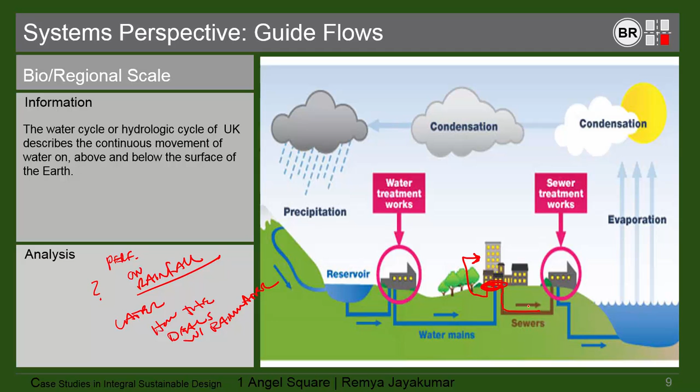All right, so there's that. So this is good, it's almost really a global. You could actually say this is a global. And one of the things we're trying to do is, if water is being cleaned here, it can actually go back into the building. I wonder if they did that, because what's happening is water's going down this way and being sent out here, and you have to wait a long time for the water to come all the way back. So, all right, good. So this has a global identity, specialist activities, and employment opportunities.

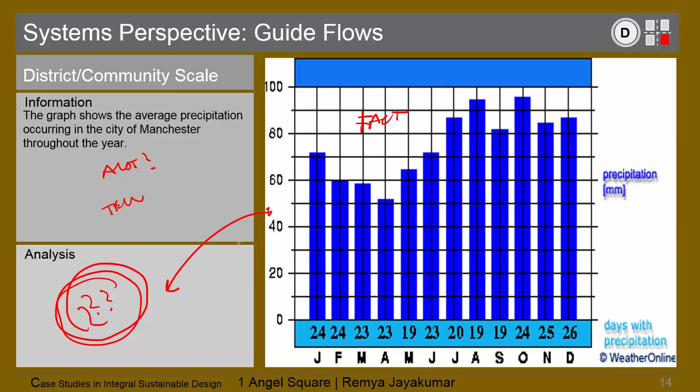I'm going to talk about BREEAM at the site scale - I would wait for the building scale. But I might also put this at the manifest meaning level, because it talks about the ethical meanings. But this is fine.

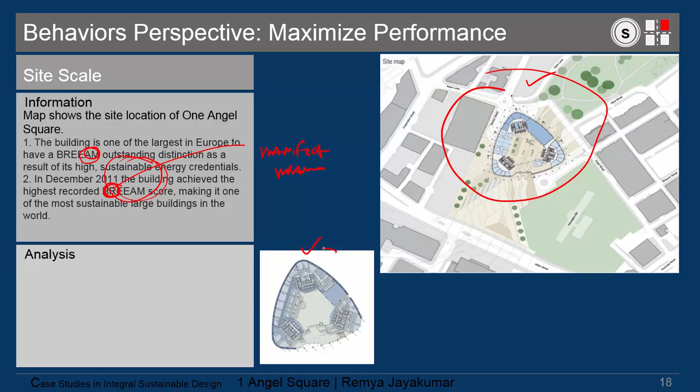You can use this at the building scale for performance. So really, you definitely need to get this for the building. Let's see - and this is really building, this is really not site.

What's really interesting here is this is a great systems one, right? So they're pulling fresh air - this is called an earth tube - and then they're running it out. Building sustainable cogeneration, oh that's good. So where is the cogen plant in this drawing?

Don't see it. It'd be good to see some of this - this building has used rain, right, so I need to see more of these. Where is the rainwater? I see the rain, and I see the showers. Where is the cistern? You've got a double skin facade there, that's cool - kind of a cool building, actually.

Thermal mass, great. So what is your analysis? Are these effective systems? What problems might they have? What benefits might they have? You've got to dig a little deeper.

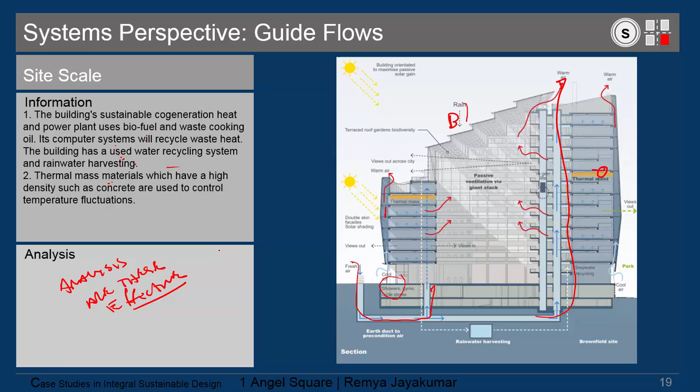See, now I would put this under systems as well. Oh no, this is good. Sliced egg, this is symbolism. Right, so this is right. So this is symbolism, and that is a cultural reference.

I think that's fine, although I would get some sources, like who nicknamed it. I would get some sources and some articles.

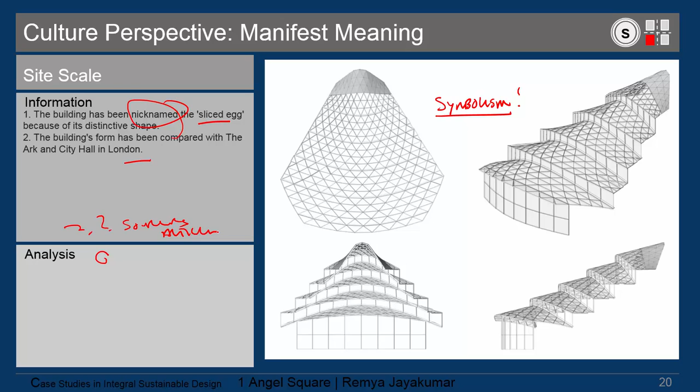Okay, that's good. You're still up a little too high in the sky, but it's pretty close. Is this a rendering or an actual photo?

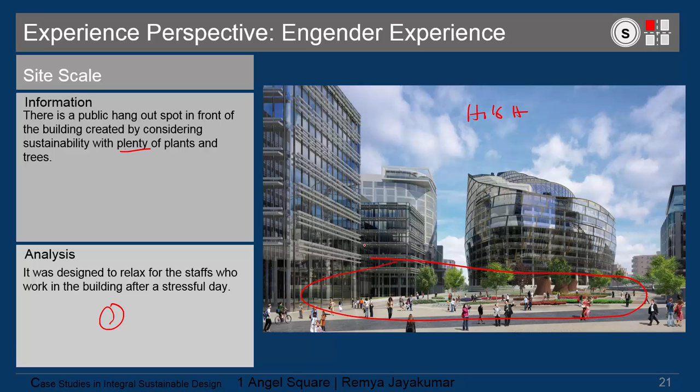There's a public hangout spot in front of the building, created by considering sustainability with plenty of plants. I don't see a lot of plenty of plants there. Designed to relax for the staffs. Okay, so that's good, I'd like to hear a lot more about this plaza here. It seems pretty important, but you don't have a lot of written information on it.

And at the building scale, the 15-story building is three sides, right? There's a full height atrium. Behind the balconies are a large column-free space.

It'd be nice to have something that explains this. You could use the same sections over and over again for different purposes. These are good drawings.

That's that section drawing, right? So what I think's missing here is I'd really like to see each one of these on a slide blown up and talked about and discussed.

You're really lucky, I think that's a structural system, especially because you're a CM. I think each of these needs its own slide, like you did for that one, and each of these needs a slide to talk about why it's important. This is a really interesting analysis that you need to talk about.

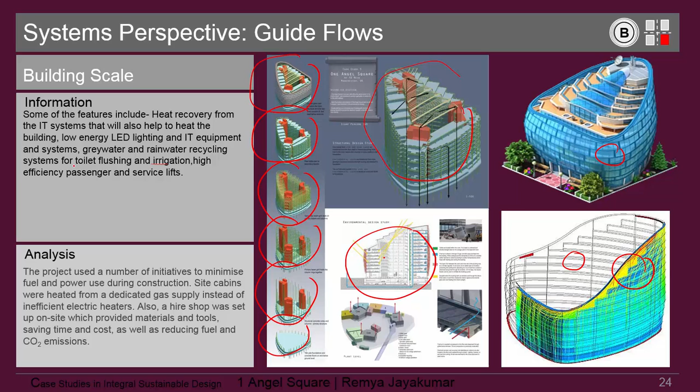The number of initiatives, like, so you say a number of initiatives, I would go one by one and go through them.

I know you want to get an A in this project. So give me a lot more here. Spend a lot more time on this and really dig into how this works.

Okay, so this is good. So you wouldn't say that under... oh wait, what happened? I was wrong. Oh right, okay good, so that really should go under experience, right? And this should go under experience.

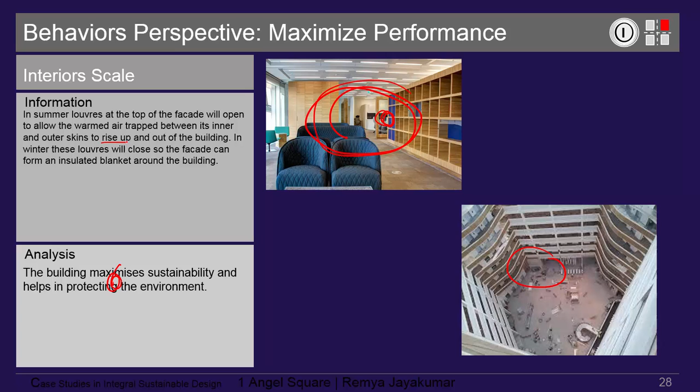There's an air trap, so you already told me that before with a previous diagram. Is this performance, or is that a system? Is that a light fixture?

Sort of, I don't know if the building doesn't look as good as I thought it would look. Those office spaces could be pretty good.

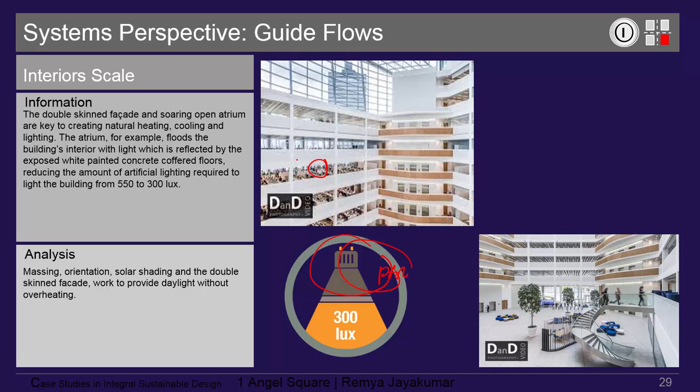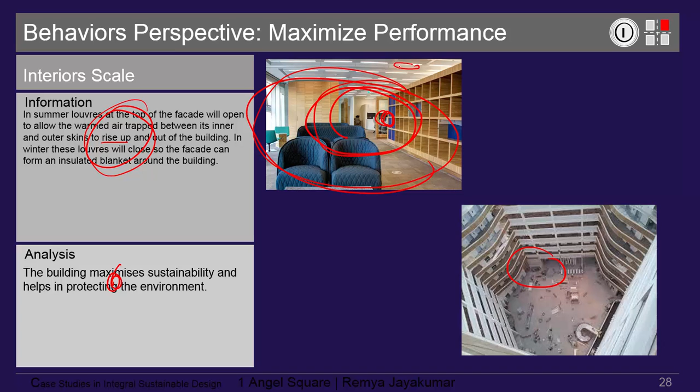So a lot of the guide flow stuff here has to do with, you got to really try to find a space. So you really want to take this space here and talk about systems in this space, like the lighting, for example, or the windows, or some sort of system that might be understood.

This is good. No, see, no, you want to tell me why this is beautiful. This information goes under performance.

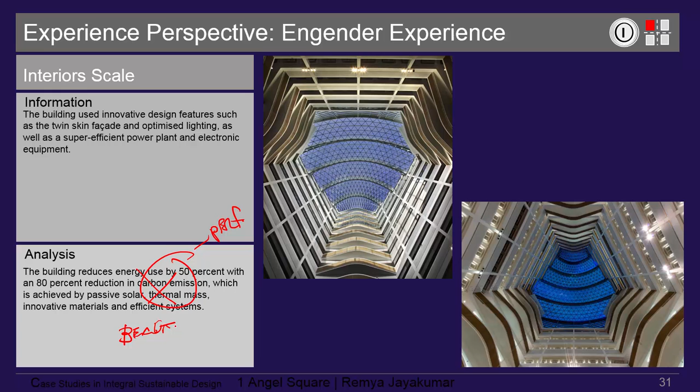So, the main grading here is really about how you're putting different information in different quadrants and different scales. So is this a beautiful view? Pretty much. So first off, this is worth 35, and second of all, read this rubric because it really talks about how I'm going to grade you.

All right, so let's hit the drawing board. Let's go back to the drawing board and get this thing to be an A project.